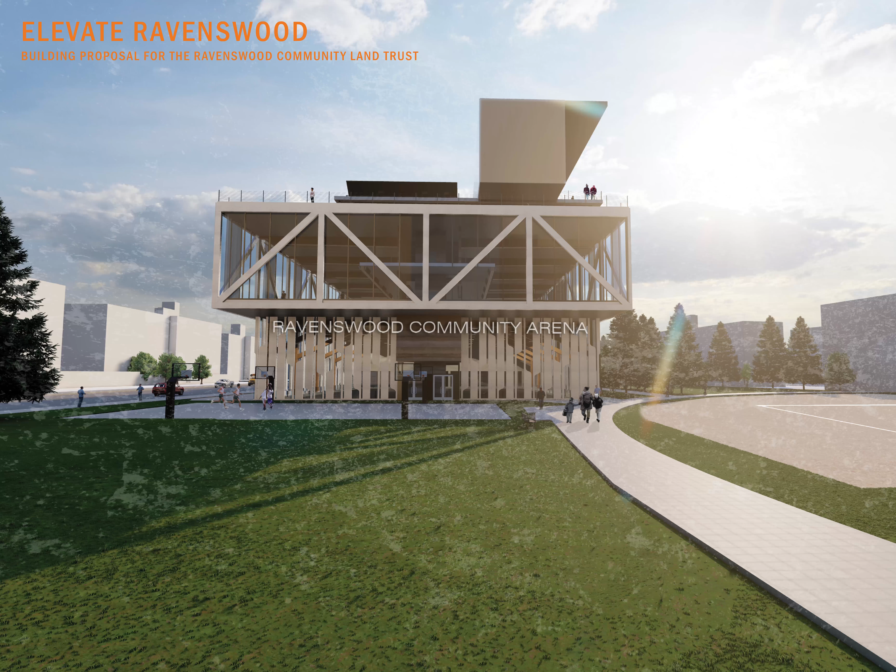Elevate Ravenswood is a health-centric mixed-use sports, education, and commercial building proposal for the Ravenswood Community Land Trust. The intention of this proposal is to bring excitement and interest from outside sources, thereby creating a larger ecosystem of citizens, volunteers, businesses, and funders to collaborate on the project.

On a macro scale, the role of a community land trust should be to improve the equitable well-being of its community through effective, shared investments that have long-term benefits for all. Elevate Ravenswood proposes a building and program focused on creating a sense of conviviality in the community through emphasis on community health and well-being.

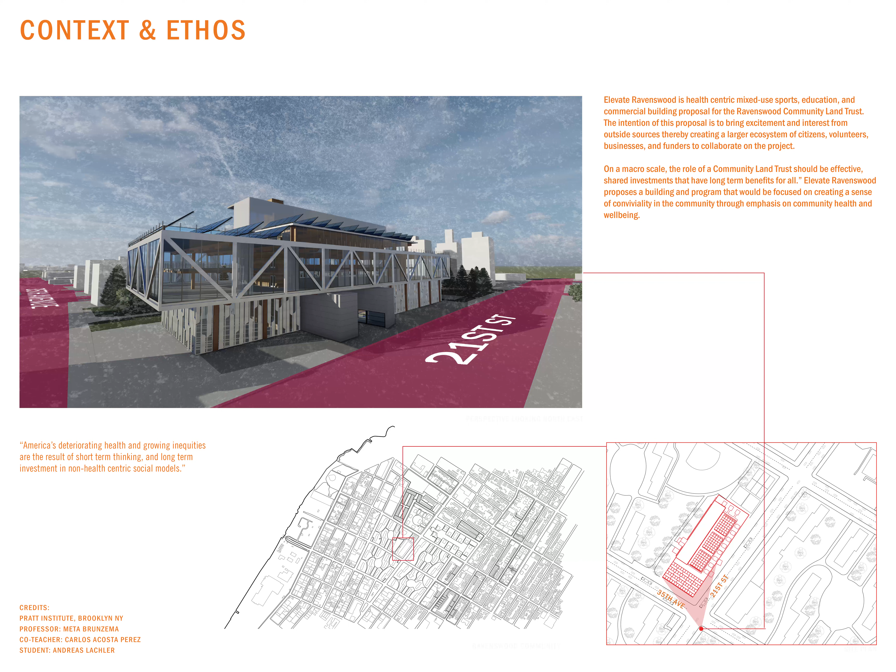Located in the heart of Ravenswood houses, the site offers a unique opportunity for community outreach, engagement, and participation. The framework of Elevate Ravenswood emanates from three fundamental pillars of community health: nutritional well-being, physical fitness, and social support and engagement. Each of these pillars has its own challenges and historical precedents that make it relevant to the Ravenswood community.

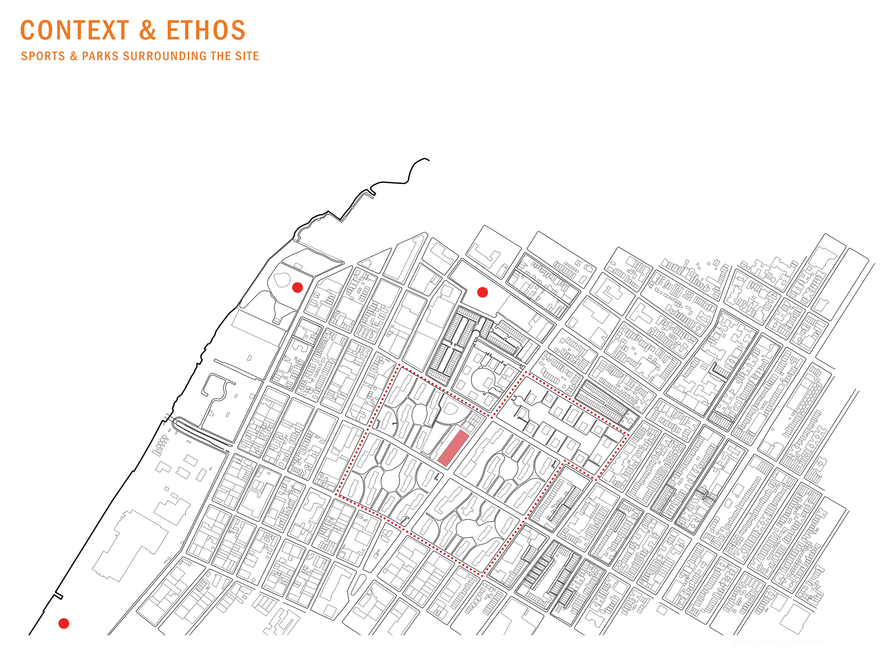Elevate Ravenswood would offer unparalleled access to sports and physical engagement opportunities in this neighborhood. In conjunction with sports facilities, the proposal hopes to bring vocational training to the heart of Ravenswood with the incorporation of a culinary school and a flex space for expansion.

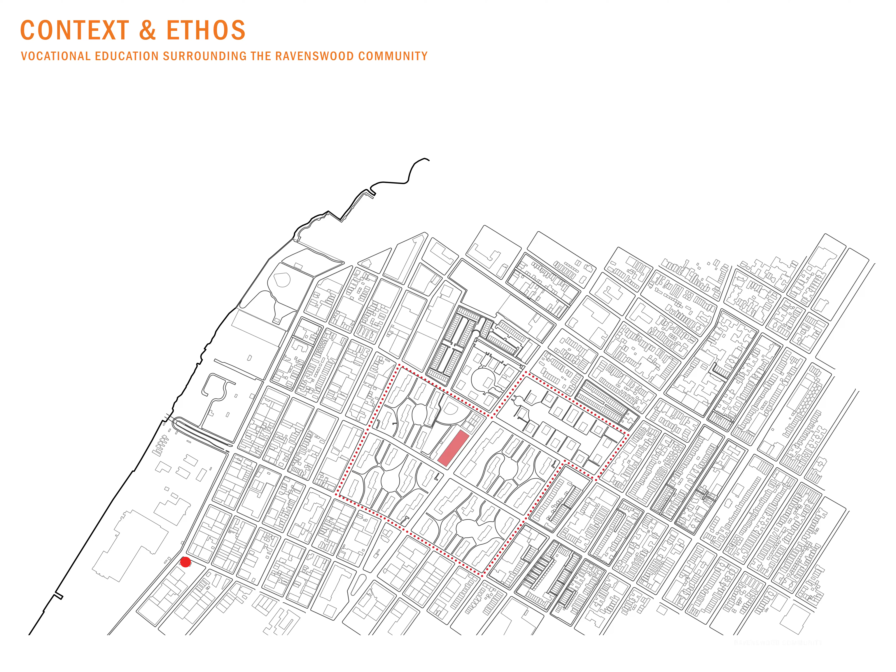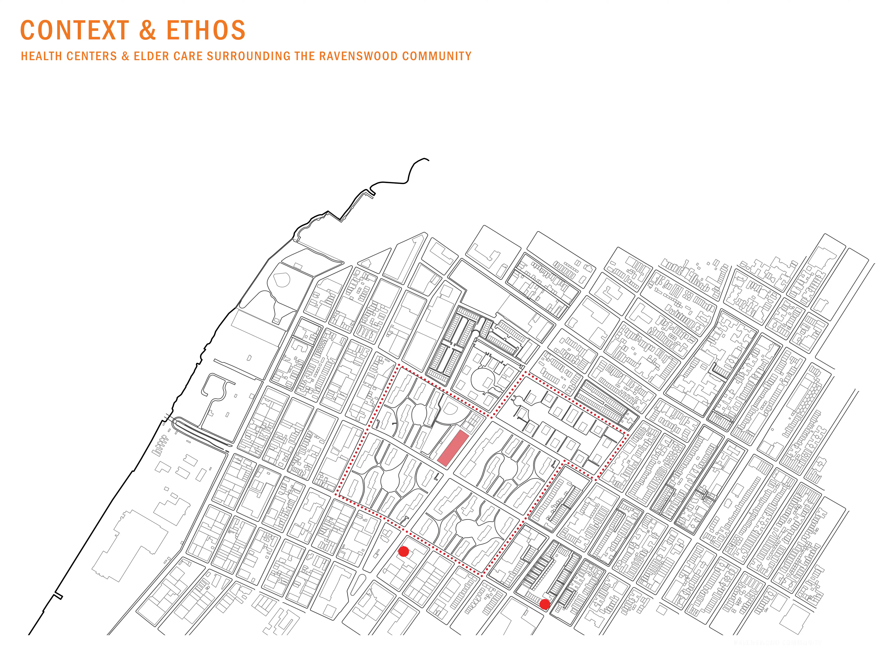As part of a community land trust, the building must cater to all members of the community, old and young. The inclusion of senior care facilities and community health offices is key to rounding out the proposal.

Located on the corner of 35th Ave and 21st Street, the site offers extensive access to foot traffic and park views. Rising up 68 feet, the proposal for Phase 1 would give the community access to nearly 100,000 square feet of usable space from the start.

Phase 2 would build upon that and expand the building to 122 feet high and add an additional 30,000 square feet of classroom, office, and community space once funded.

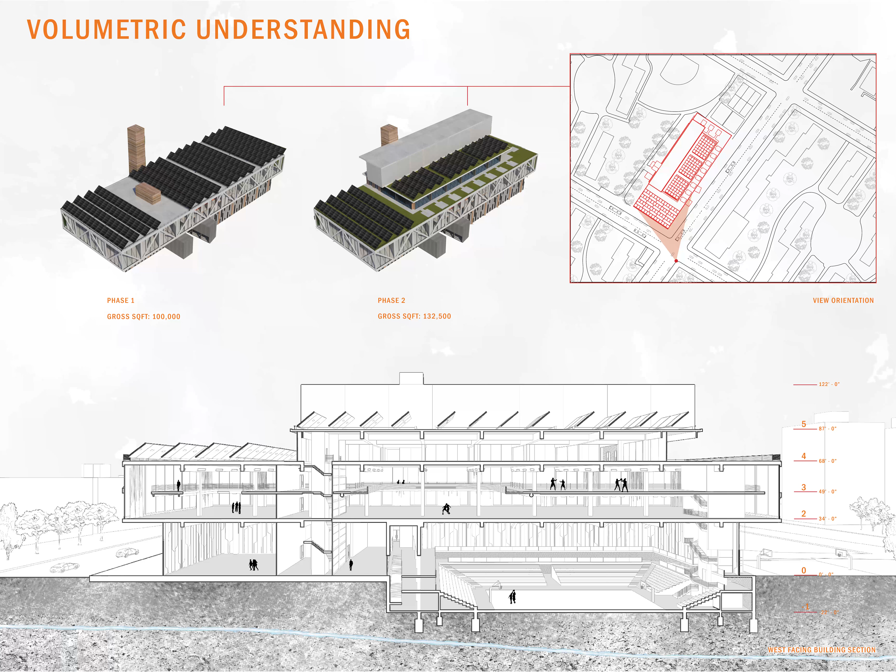Embodied and operational carbon are key terms in the modern world of construction and design. They are exceedingly important concepts to address when creating a design and can have a huge impact on material and construction costs. Embodied carbon is all of the emissions produced before building occupancy, so manufacturing, production, and transportation of building materials.

Operational carbon is the emissions created by the use of energy to heat and power a building. Together, these combine to give a complete picture of a building's carbon footprint.

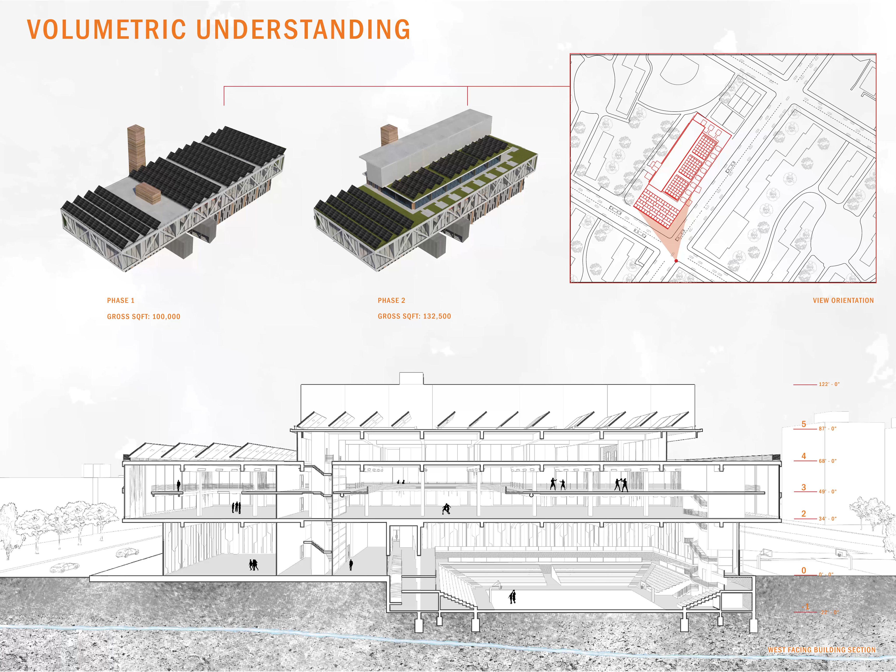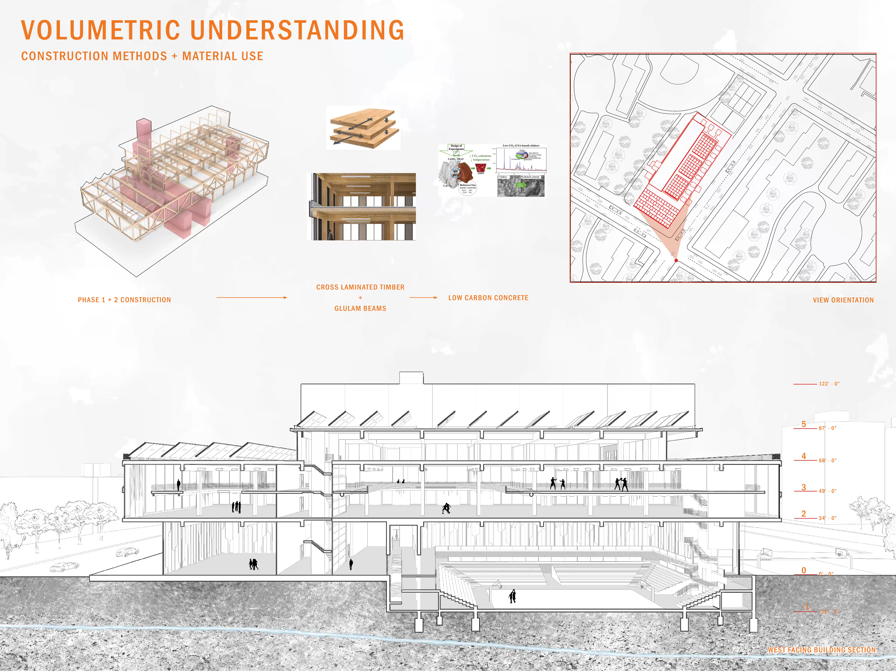In Elevate Ravenswood, we hope to solve several problems at once. If we choose sustainably sourced, locally produced mass timber construction over traditional concrete or steel construction, we can reduce manufacturing emissions, cut material transportation costs, and speed up construction all at once.

By combining prefabricated cross-laminated timber panels and glulam beams with low-emission concrete, this proposal aims to cut down on embodied carbon as well as reduce construction costs.

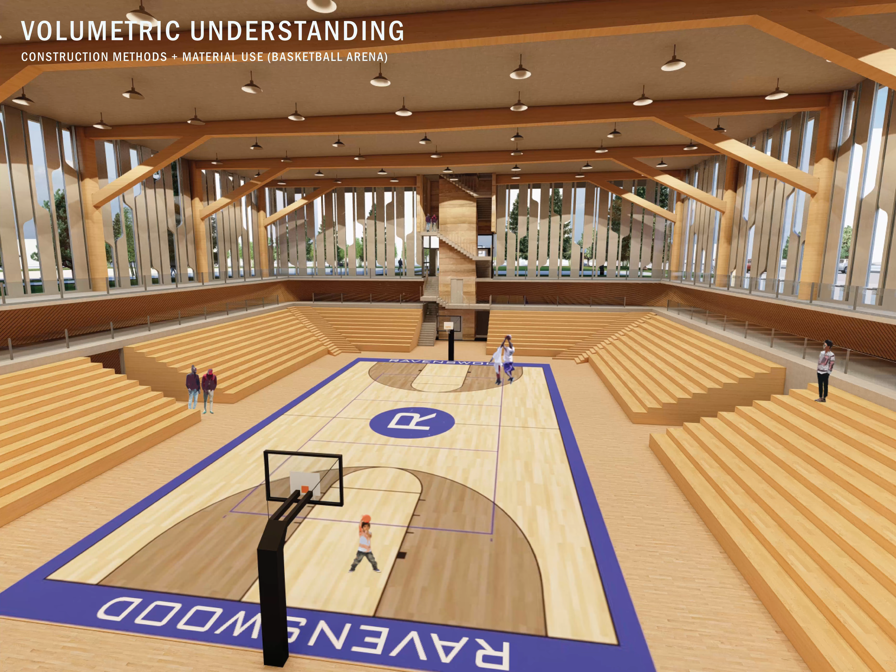Elevate Ravenswood operates around three circulation cores that, combined with a wooden Vierendeel truss system, account for the major structural elements of the building, as well as provide large open spaces for community use.

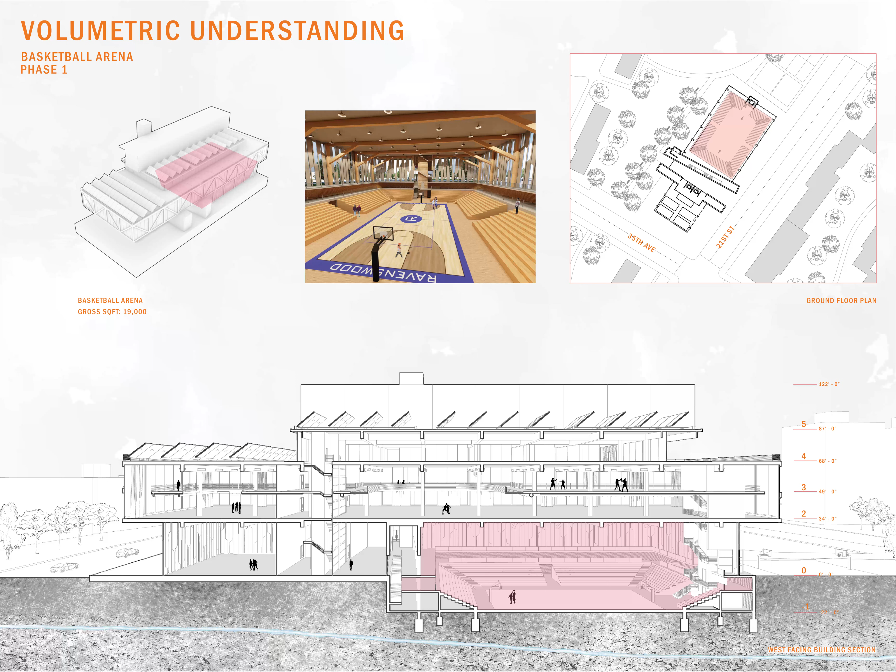When talking to community members about what they wanted from this building, two things really stood out. The first being a large basketball arena for local community members and teams to use.

Its placement on the ground floor, somewhat submerged, is crucial to keeping it inviting and accessible to the community. Anyone can look in from the street and watch games.

The second important programmatic element was emphasized by the older community members. They want senior care facilities and community health offices. This ground floor space offers the flexibility to have several different configurations and combinations of the two.

Flex spaces are a big part of the design of this proposal, as a community's needs will change and grow over time.

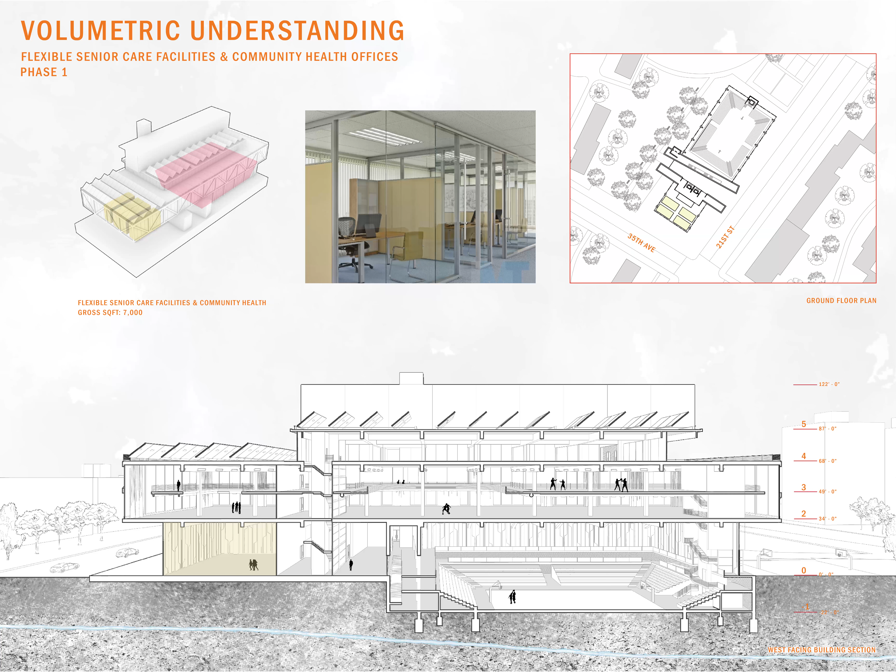Physical health is pivotal to growing and maintaining a community's longevity. Elevate Ravenswood incorporates extensive indoor sports facilities into the program of the building.

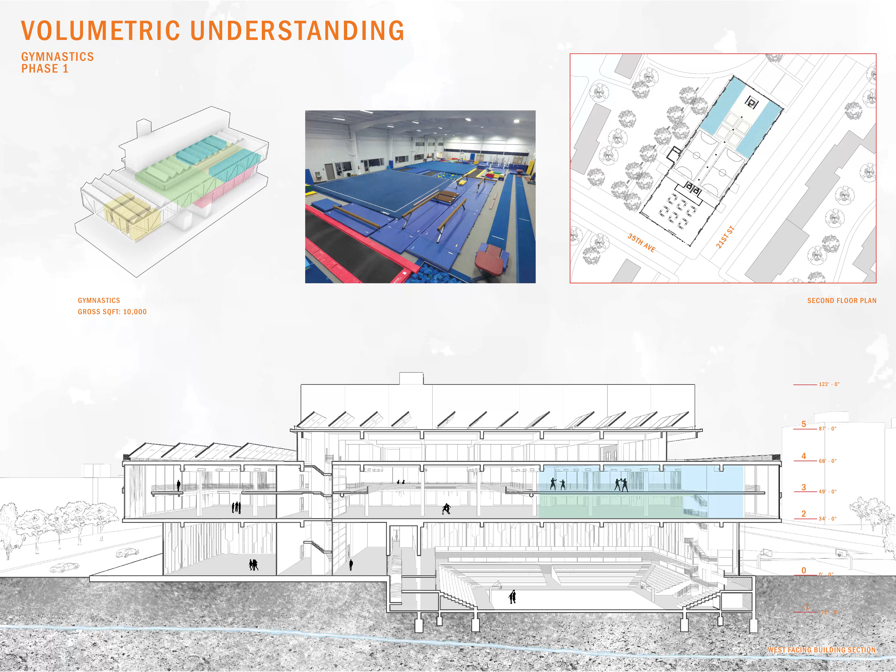Along with a basketball arena, the building has indoor soccer fields, an extensive gym of both free weights and boxing equipment, a gymnastics training area, and an indoor track.

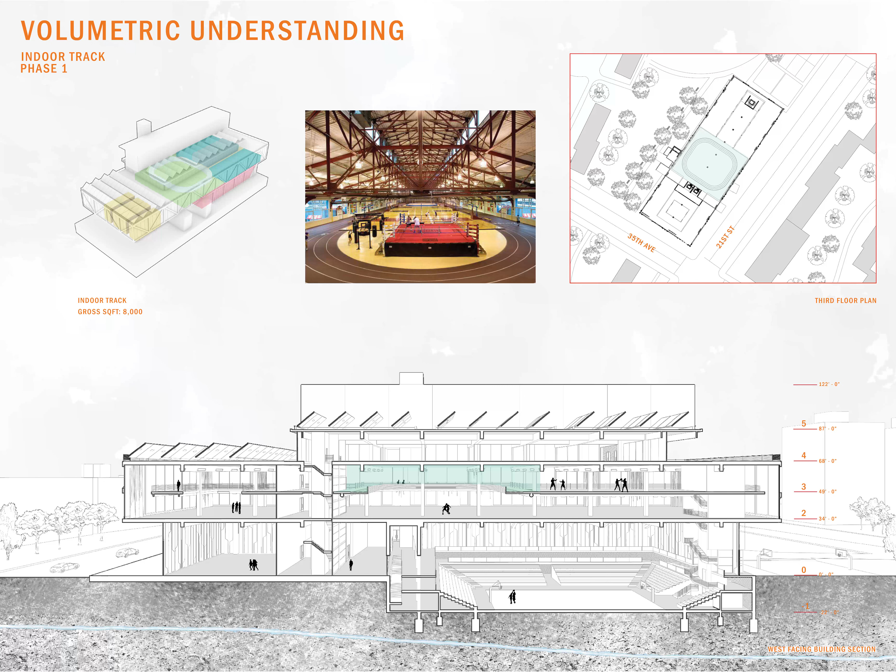Elevate Ravenswood's program includes a culinary training school, which would offer anything from simple education to proper vocational training. The food industry is one of the most lucrative blue-collar occupations in a growing manufacturing sector in New York City.

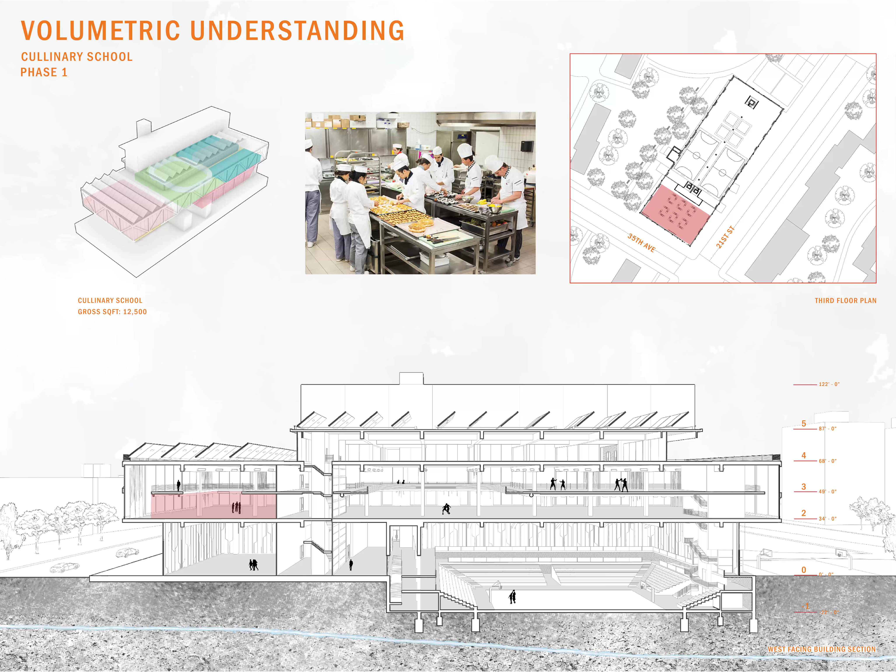It is especially welcoming to women of any age, as it compensates for traditionally unpaid domestic work. This program would have several cooking spaces designated within the building for bi-weekly cooking seminars, as well as a space for a commercial kitchen incubator, where new businesses can rent space to test out small-scale business ventures.

This adds to the CLT's long-term funding. As part of a community land trust, the building needs to promote the values mentioned before of improving the equitable well-being of its community through effective shared investments that have long-term benefits for all.

Realizing this through programmatic and instructional additions led to the incorporation of elements such as a community meeting space, audio and visual recording spaces, and a community health training program.

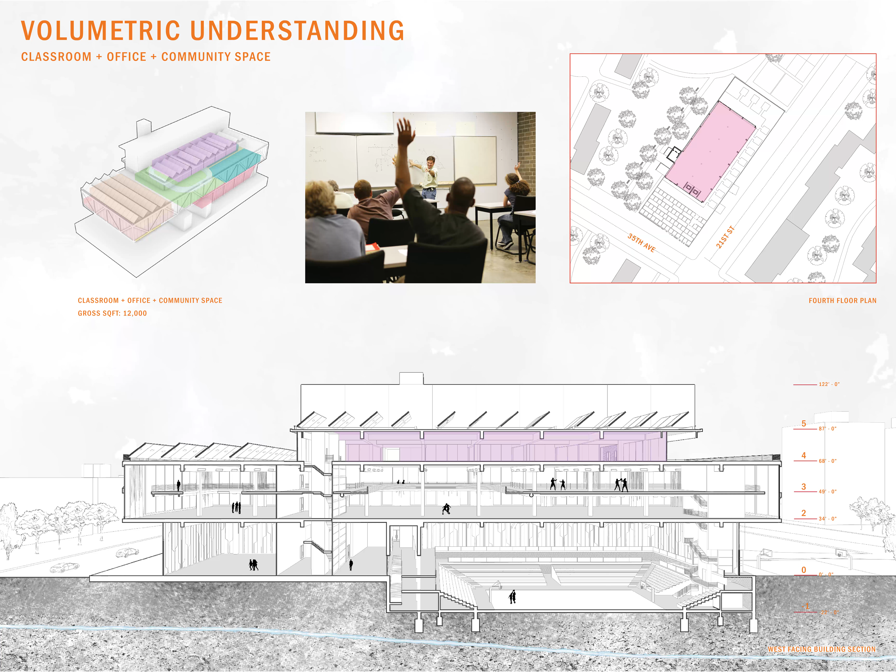The CLT should be a place of pride and respect, somewhere individuals can gather and share goals and ideas about their surroundings. The Elevate Ravenswood proposal hopes to bring a functional, flexible, and exciting building to the neighborhood.

The Ravenswood CLT is poised to set an example of what a community land trust can be and accomplish with the right support and backing.